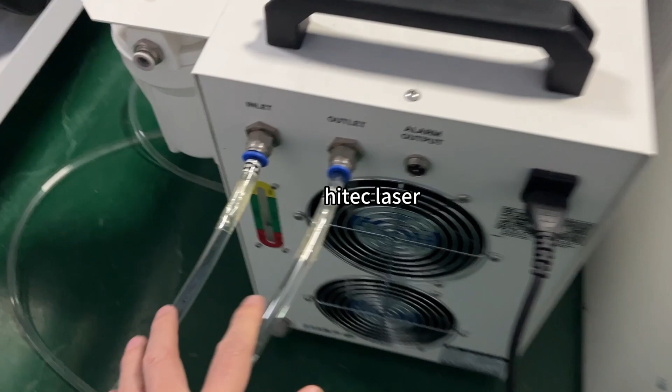Water chiller out, connect tube out. Water chiller in, connect tube in.

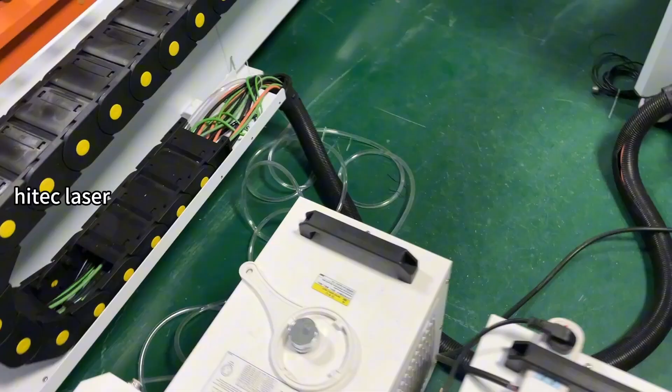Laser in, connect tube in. Laser source out, connect tube out.

Here water, chiller add water. From here need to add pure water or distilled water.

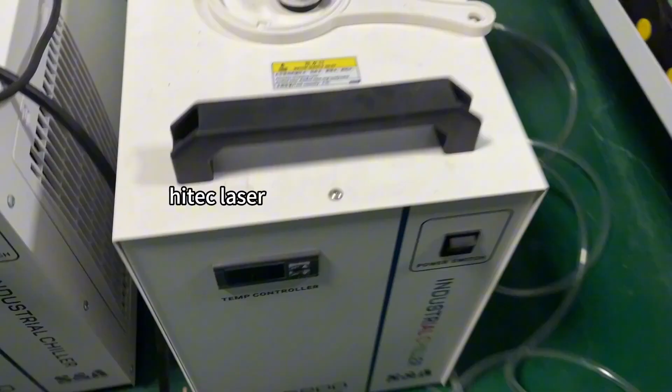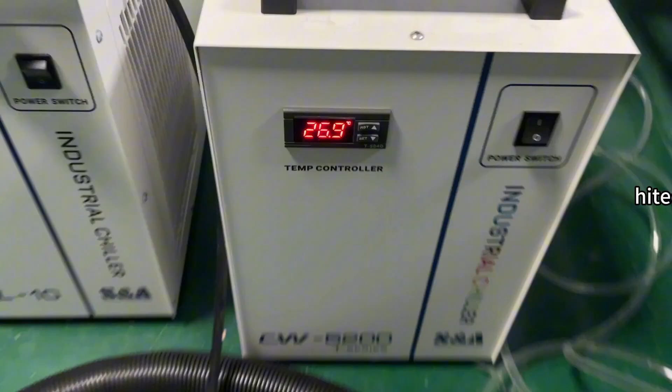Turn on water chiller. When the temperature is up to 28 degrees, that's okay. Here laser source 28.

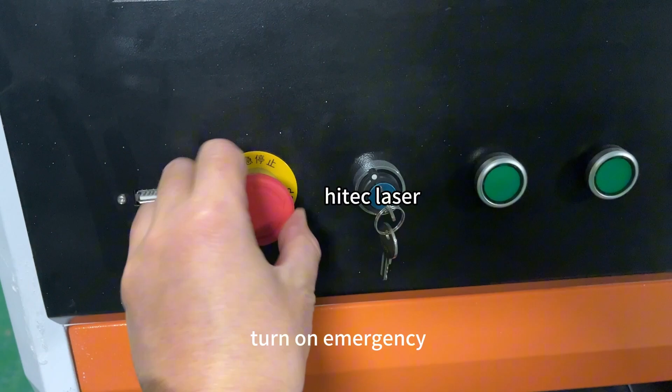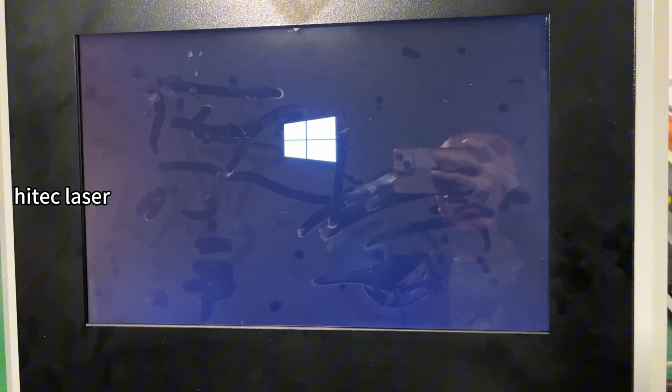Turn on emergency. Computer turn on. Turn on software.

Manual, click X1, debug mode. Keep for 10 seconds.

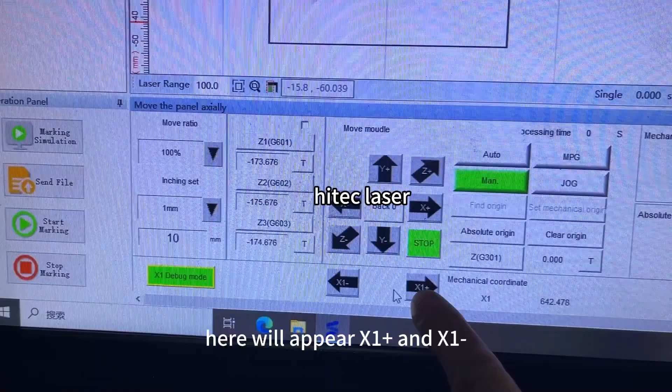Here will appear X1 plus and X1 minus. Then we can move dust collector.

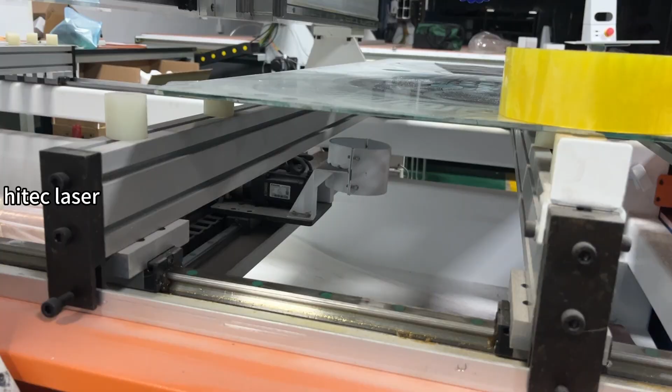Click this, it will disappear. Then we can move axis.

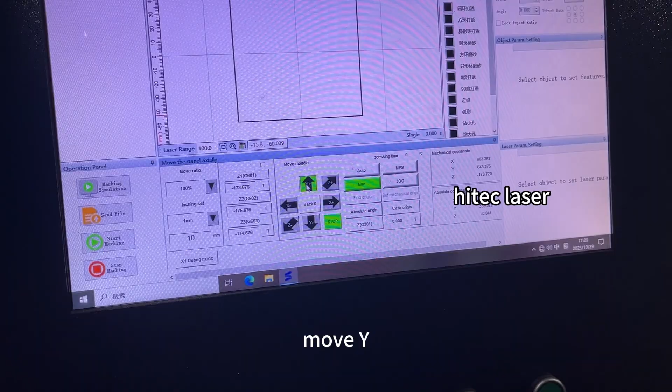Move X. Move Y. Jog mode. Here set step, move size. Every time move 10 millimeter.

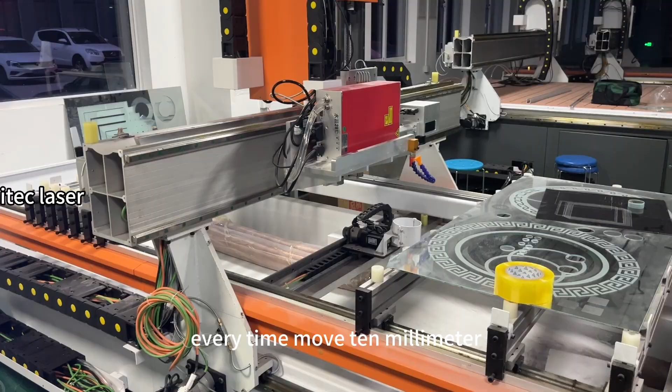Draw a circle. Change the size. 200. Center.

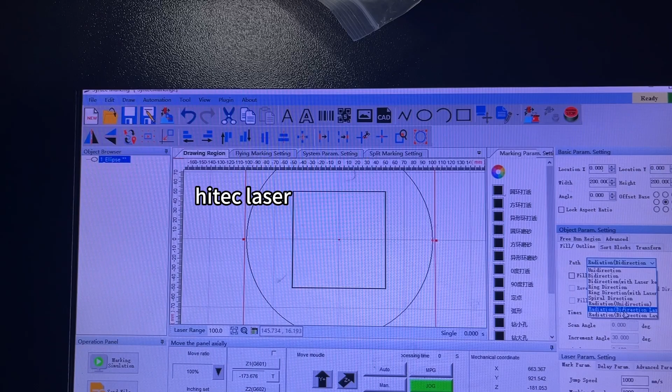Draw another circle. Change the size. Center.

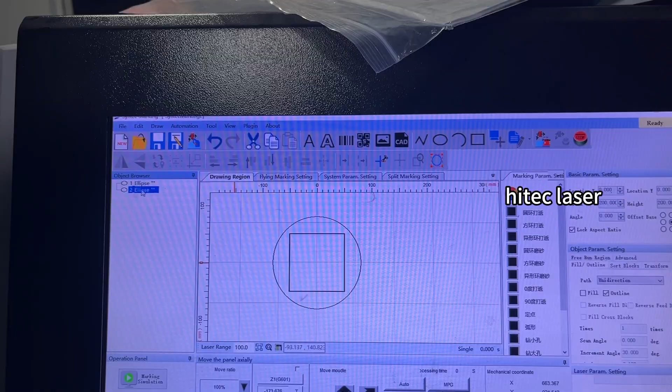Select these two circles and combine. Fill. Click ring frost. Check parameters.

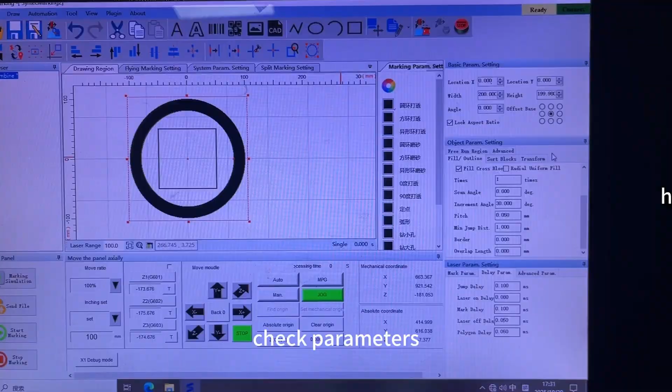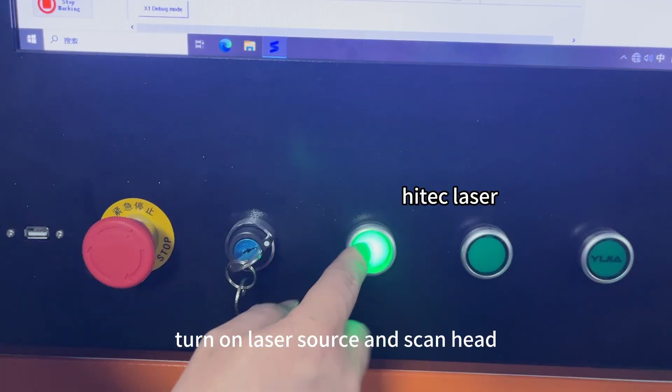Turn on laser source and scan head. Simulation.

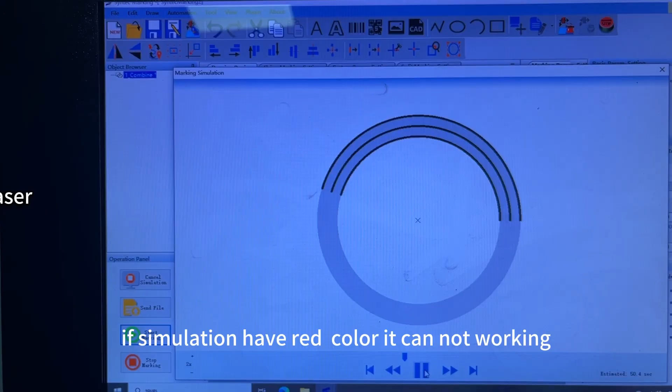If simulation is black color, that's okay. If simulation has red color, it cannot work.

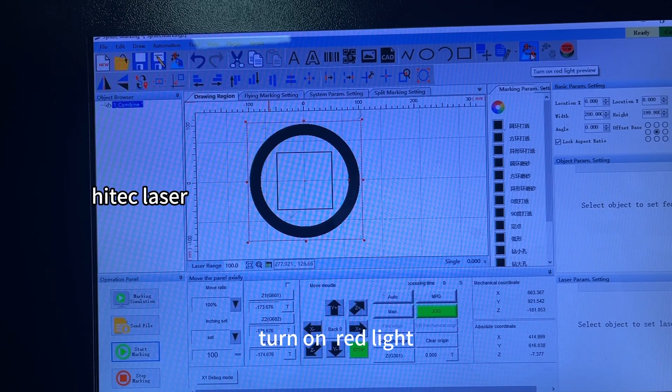Turn on red light. Check marking location.

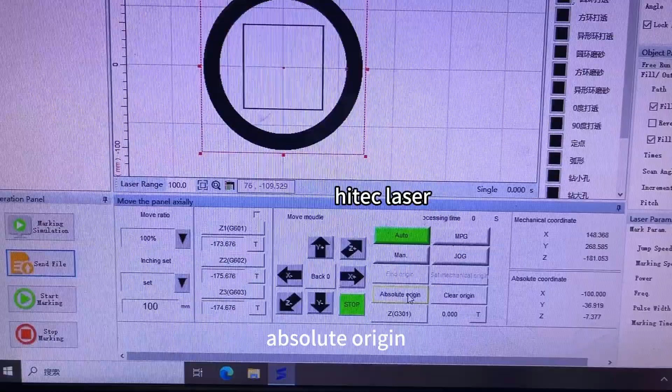Stop red light. Send file. Absolute origin. Z1 is for sandblasting.

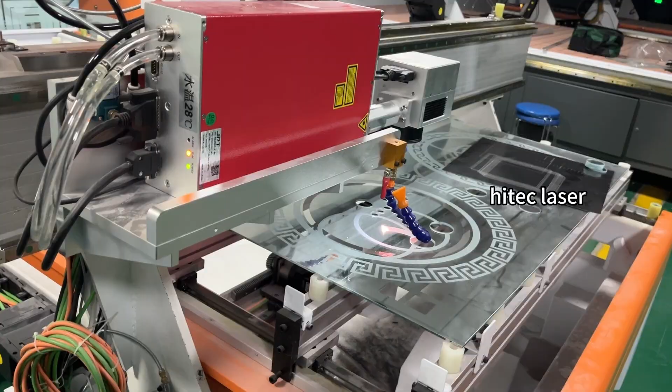Click mark. Z1 is for sandblasting.

Z2 is for mirror transparent. Z3 is for drilling.